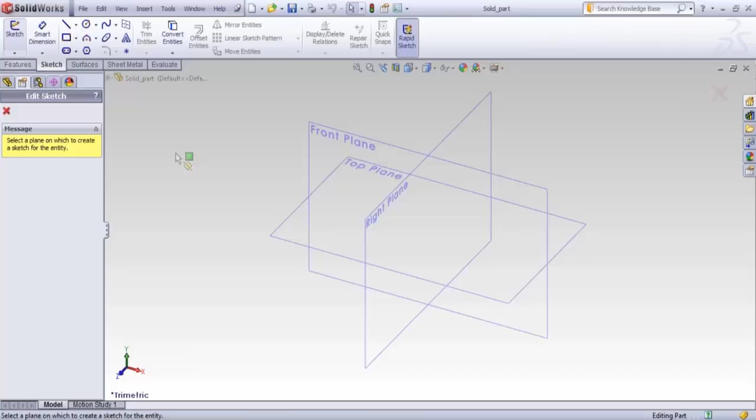Now we are starting the first feature, which is extruded boss here. First of all, we have to create a base sketch here. Now we'll see there, we are just having the 2D sketch.

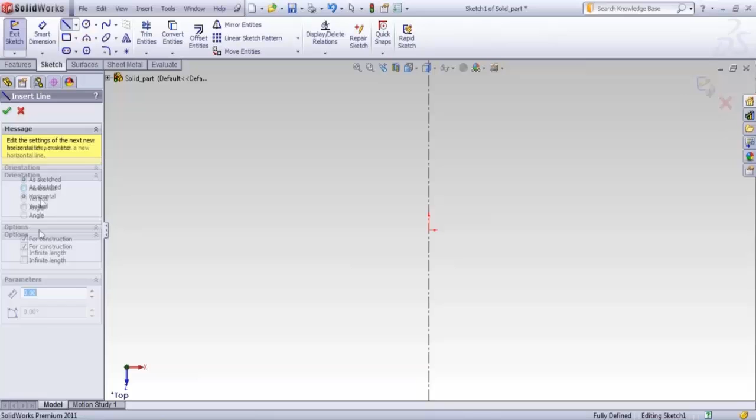Select the plane, and now first of all give the center lines. One, horizontal is the second center line. We have just placed the center lines into the same center point, which is origin also called, and now we are defining here the center point rectangle.

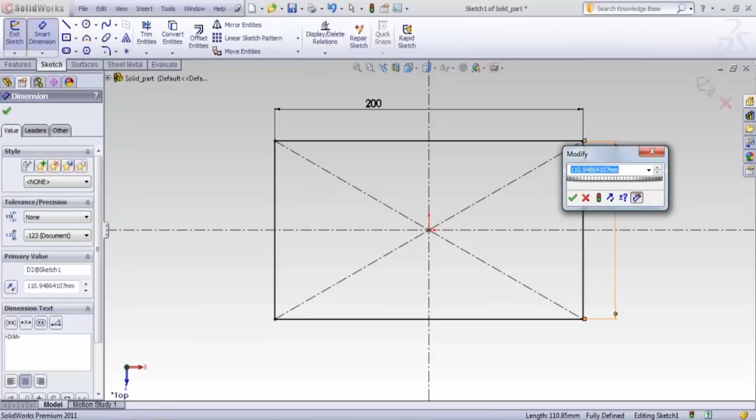The value we have defined is 200, and we are defining the value here is 100. Exit.

Now we have the option here which is isometric view. Ctrl+7 is the shortcut of this, and now the object has been tilted to 30 degrees.

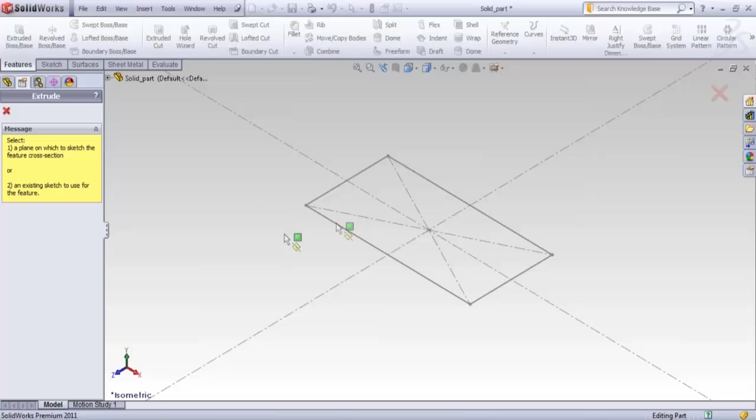And now we'll see the feature here which is extrude feature. Now just pick the feature here, and now pick the sketcher.

And now we'll see here is the dialog box of extrude boss, and now you will see there, this is the OK button, this is a cross button which is also called as cancel button, and this is a preview button. And now we'll see there, we have direction 1, direction 2, thin feature, and selected contours.

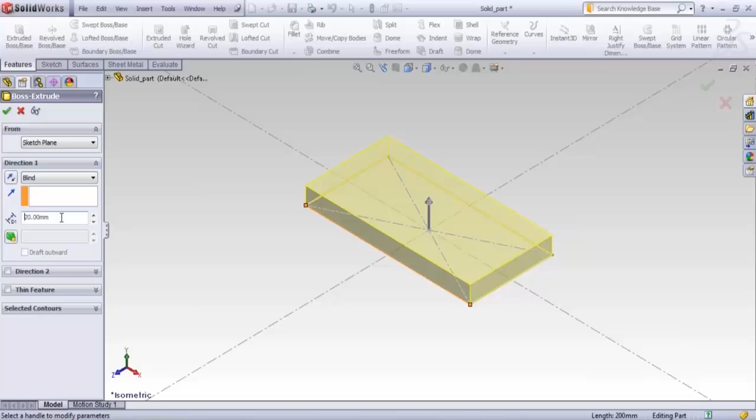Now we are going to use the feature which is extrude feature, and here we have one direction. Direction 1, if I am giving the direction in the blind section only. So now the value we are defining here is 20, or whatever the value you need to have, just give the value here. And after that, if you want the value in both directions, meaning it should be symmetric, half at the upside and half at the bottom side.

So we are just having the feature which is called mid plane. Now the part has been divided into two parts, 25 upper side and 25 lower side. That is called direction. The value we are defining here is 100. Now we'll see 50 is at above side and below side will be 50.

So now one more thing, if I want to have a non-symmetric job here, go for the blind feature, and now give the value. That is the first value, and the second value will be given by direction 2. Here you will see the second direction I am giving is 30. Now the value will be different. So this is the second value I am defining here, and here you will see blind feature blind 2.

Mid plane will be coming in direction 1 only, not in the second direction. And you will see there, if I am using only one direction, we have one more option which is called draft on and draft off.

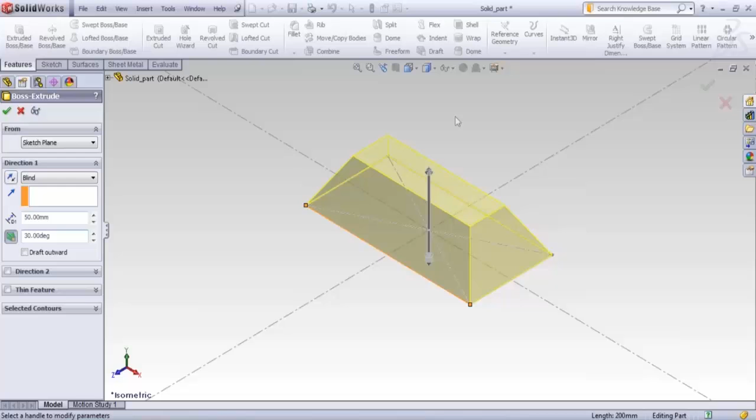I'm just picking the option here, and now I'm defining the angle value here. So the angle value we are defining here is 30 degrees. Now you'll see there, all the faces will be tilted accordingly, like this.

Again I'm going to enter into the command. Now the value we are defining here is 50, and you will see the distance and angle I am defining like this. That is the angle of 15 degrees.

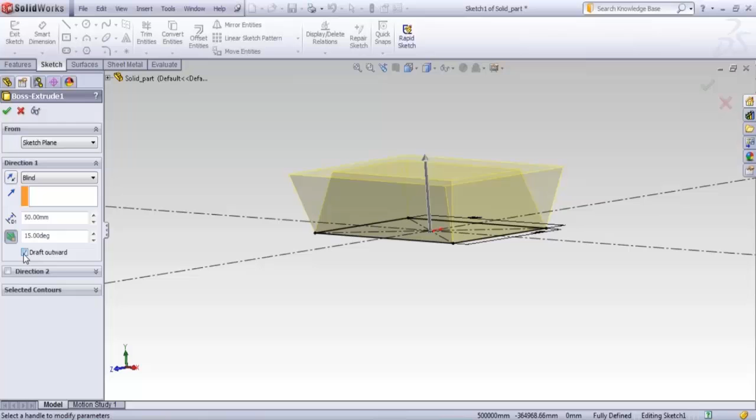So we'll see there all the four faces, the little faces will be in the direction of 15 degrees. Direction can be changed this way, and now we have the option which is called draft outward as well. So it will be working like this, inward and outward.

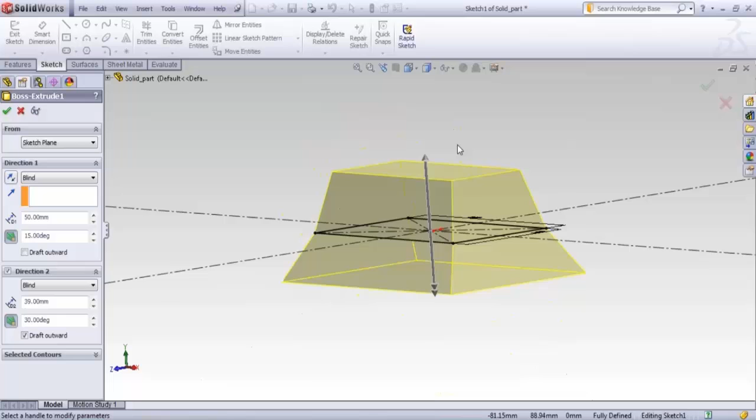Here is the option which is called direction 2, and here too we can provide the value which is in degrees. The size I am defining here is 10 degrees, and now we'll see that can come into outward and inward direction. Here the value we are defining is 30 degrees, so we'll see the object has been changed like this.

So for rotating it upside and downside and right and left, we can use the arrow keys as well. And that's all. That was the feature which is called

extrude feature. Now we'll see there in the same manner we can use the feature which is extrude cut. But before using the extrude cut feature, we have to use extrude, revolve, sweep, loft, boundary, whatever feature you need to have, because these base features can create the solid model and these features can cut out. But cut can be possible only after having the solid feature. So before starting this feature, any of these features, you have to work on the base features first.

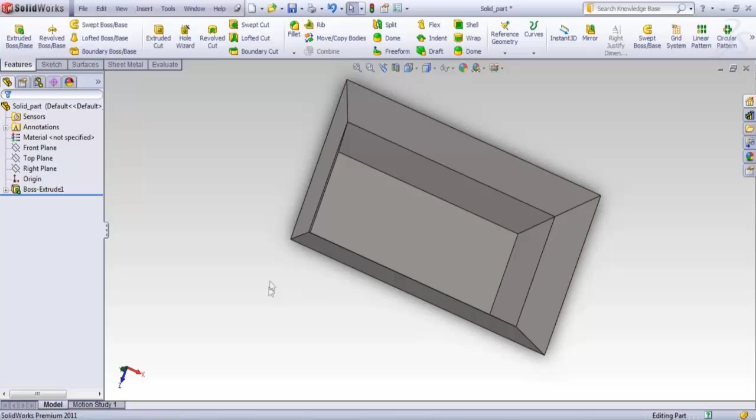So now the next feature I am using is extrude cut. How can we use the feature which is extrude cut? Just pick a solid surface here. Any of the surfaces I can pick here, which should be lateral, which should be in a linear manner, not in a circular or cylindrical manner.

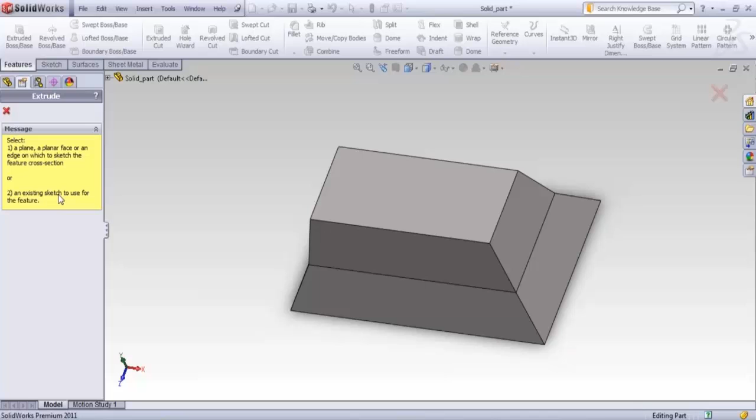So I am just using the feature which is extrude cut. Now it is asking me to select a planar face or sketch already defined. So I'm just using the face, and that is the face I'm going to define. And now Control 8 will be normal to screen. And now just use the feature which is sketcher.

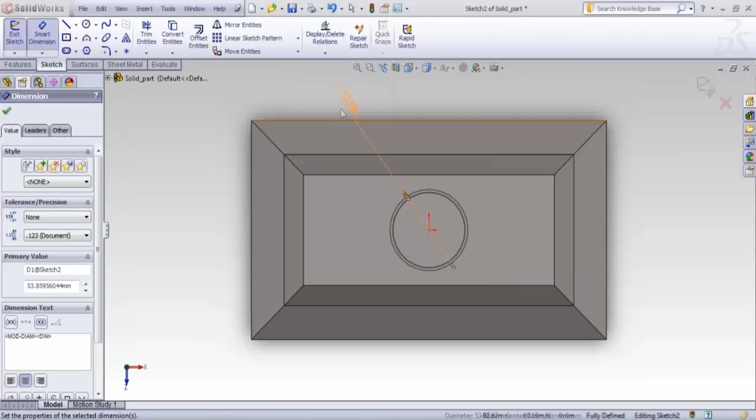I'm just taking the circle option here, and now I'm creating a circle at the center of this. Exit and give the 50 value. Here too I'm defining the value. So we can define multiple circles here or multiple profiles here according to our need.